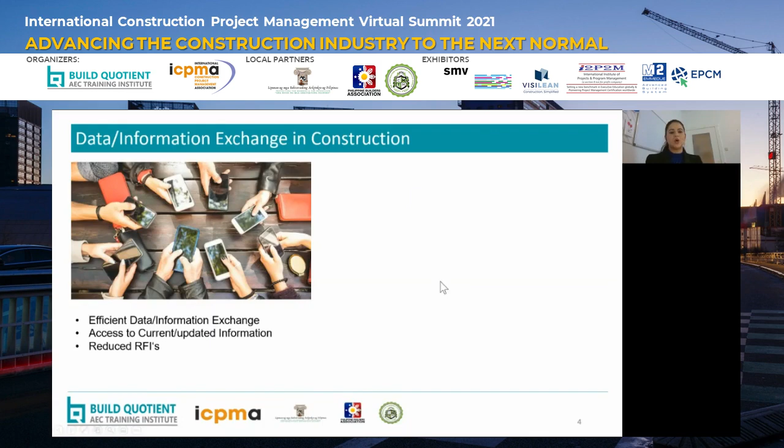Also, you can access current and updated information by using the internet. You can access all the information that has been stored internally, or in a cloud or a drive, and also share information with other people. In other ways, it has helped us reduce the requests for information that we require. So this is what our every day looks like. It's so easy to exchange information with one another.

But what does it look like in our construction industry? I think this picture speaks for itself. This is how information in our industry looks, how we exchange information with each other, and how we access the information. So I will put here a big question mark, because this is something we all need to think about, how we are going to go forward.

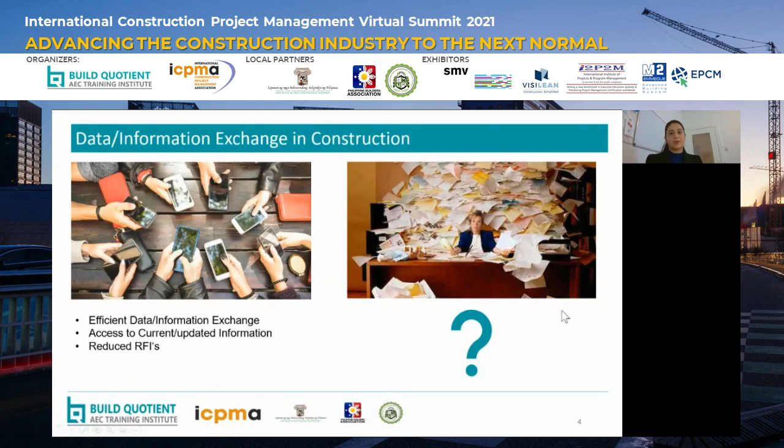So this is something definitely to think about. So let's go forward. So now the topic for today is the productivity in construction. Well, I would call it productivity loss in construction. And let's see how it happens. So now the construction industry is actually facing loss in productivity.

And after the research of the global report from KPMG, they figured out that only 60% results are achieved when compared to the other industries such as manufacturing and even agriculture industry. Now, why does this happen? Well, there could be a lot of reasons why there is non-productivity in construction industry, but one of the basic reasons is the existence of waste activities, or popularly called non-value adding activities in the construction.

Now let's just talk about it. What are these waste activities? Well, just a disclaimer before I go forward, I am not talking about the waste that we generate from our construction industry. That's a whole different topic to talk about. Today, what I'm talking about is the non-value adding activities that we have in our industry. So we have, popularly called, 8 different wastes in the industry. I'll go through them very quickly. There are rework, defects, inventory, motion, waiting, overproduction, transportation, and overprocessing.

Now, most of you would be familiar that all these wastes are generally occurring in our execution phase on the construction site. Because lean was derived from the manufacturing industry, we definitely say that all these wastes occur generally on the construction site. Well, in my opinion, this is also some kind of myth, because we definitely have defects and reworks even in our design phase, or you can say in the very beginning of our construction phases. So we'll talk about it further in the next slides.

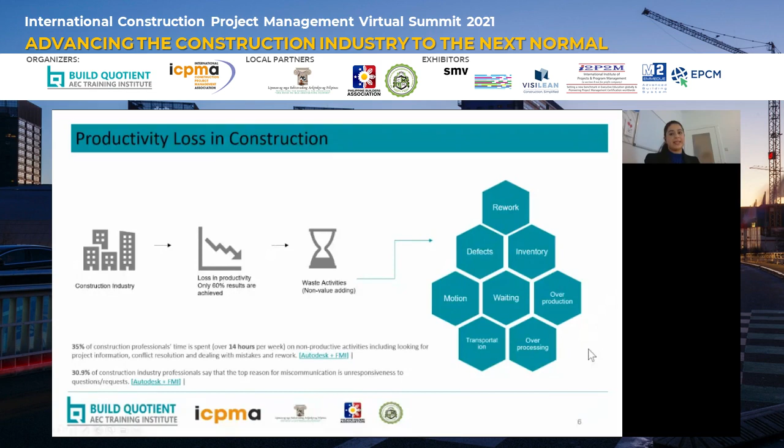So there are also some reports. 35% of construction professionals' time, which is actually 14 hours per week, is spent on non-productive activities, including looking for project information, conflict resolution, and dealing with mistakes and rework. And around 31% of construction industry professionals say that the top reason for miscommunication is unresponsiveness to questions and requests. So let's go forward.

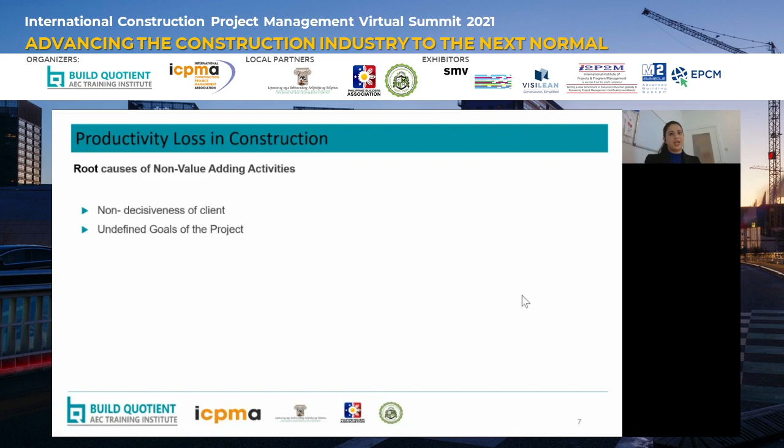Now, as I said, we have different waste activities in our industry. Let's also talk about the root causes of these activities. Well, some of them are, first of all, our very favorite non-decisiveness of the client, what he actually wants. Or maybe we cannot definitely blame our client. Sometimes the project information is not transparently delivered to all of our project participants. And that's why it's commonly called non-decisiveness of the client. Undefined goals of the project. When we don't have a vision or a goal for the project, what do we really want to build? This is actually one of the root causes for the waste.

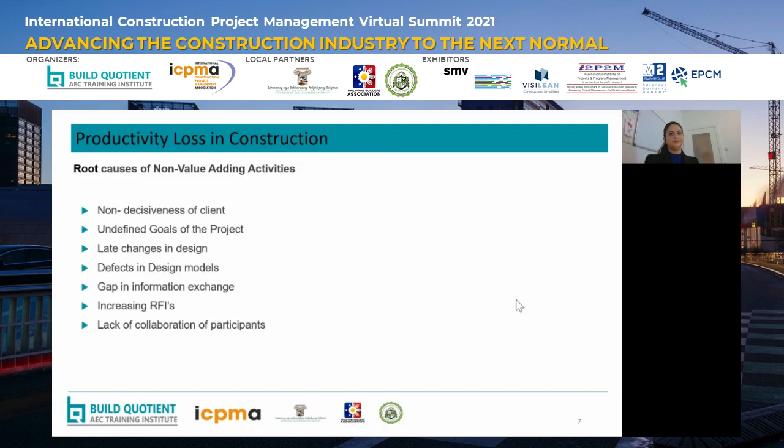Late changes in design. So all these 3 are actually correlated to each other. The next is defects in our design models. This is something to do with us, I would say. And gaps in information exchange. And last, increasing RFIs. So if you look at them, there is one thing common in all of them, and that is they are process related. These root causes for non-value adding activities are process related. So to understand how we can get rid of these waste activities, we first need to understand how our construction processes actually work. Oh, I forgot. The last one is definitely lack of collaboration of participants. Well, that's also a favorite one.

Now, what does lean say? Well, lean is a theory, but if I have to describe lean in one simple phrase, I would say lean says create value and not waste. Now, at this point, I hope most of you are familiar with what value means in lean terminology. And for those of you who are not yet familiar, I would like to explain a bit. Well, value could mean different things to different people. For example, value for me could be something else compared to value for you all sitting here.

But if we try to understand what value means here for the client, it could mean, for example, an economical design. It could mean high-end quality. It could mean that the project finishes in the time frame that was assumed in the beginning of the project. Or nowadays, we have some different kinds of goals, for example, sustainability or e-mobility. So value could mean anything. So this term is actually quite important for us, because until we understand what value means for the client, or what he is actually looking for, we might end up doing a lot of waste activities or non-required activities and then end up creating waste.

So let's quickly take a look at the lean construction principles. As I already said, lean theories were derived from the manufacturing industry, and later on, professionals and scholars gave us 24 principles for lean, and some of them are here.

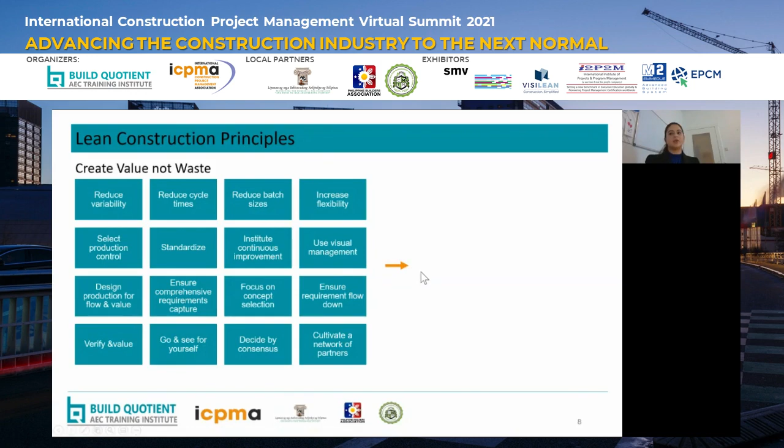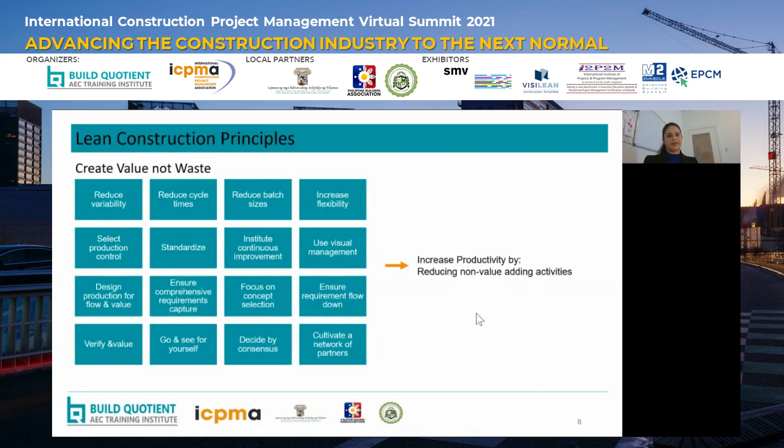If I want to summarize all of them, it says increase productivity by reducing non-value adding activities. Another point I would like to add is that lean tells us to standardize the processes. And first of all, understand that only when one phase is completely done should you move forward with the other phase. Sometimes working in parallel on all the different things actually ends up in a lot more waste than we think. This is something we'll figure out in the next slides.

So now, the topic for today: BIM, Building Information Modeling in Construction. I think this is quite a fancied subject nowadays. I have been to a lot of webinars and seminars, and you might have been as well. So today, rather than talking about what building information modeling stands for, let's first try to answer some of the questions. The first and most frequently asked question: is BIM a tool or software?

There will be different perspectives. Some might call BIM a tool, some might call BIM a software. But if I have to answer it, based on what the BIM handbook says, BIM is actually a platform, a collection of tools and softwares where we exchange information on a digital platform.

The second question: is there a difference between a 3D model and a BIM model? I come across this question at least 3 or 4 times when I try to explain to somebody what BIM can do. The basic difference is that a 3D model is a 3-dimensional representation of my own drawing, for example. It helps in visualization, but it does not contain most of the important information I would need to go forward with my project. Whereas a BIM model, as the name suggests, building information modeling, contains all the information that I would need. So this is the basic difference.

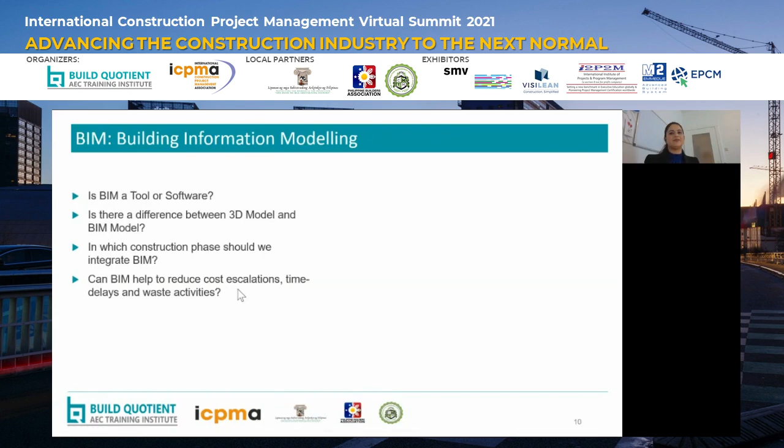As the construction matures in a project, the BIM model also has to be matured and updated through the project. This is a very debatable question, and we might talk about it later on, but in my opinion, it has to be introduced at the beginning of the project. Another question: can BIM help to reduce cost escalations, time delays, and waste activities? This is something we'll figure out in this presentation.

So moving forward: what are the BIM benefits? Before going into what BIM can actually do for us, let's see its benefits. It has pre-construction benefits in the pre-planning phases: better concept selection, better visualization of the prerequisites of the project, accurate cost estimations, early project analysis, and accurate benchmarks for the project. It also has design benefits: better visualization, design development, design collaboration, energy analysis, and cost estimation again.

Now, if we choose to do the execution phase and we want to introduce prefabrication, it's actually a time saver in this phase, and it helps us in accurate measurements because the shop drawings can be directly generated from the model itself. So it's quite accurate in its measurements. It helps in the construction sequences because we can actually link the model to our 4D platforms and try to get the construction sequences from there.

Helps in multidisciplinary collaboration. So not only does it help in the collaboration with the planners that we have, but also externally if we have external partners, for example, for fabrication. And again, the whole construction synchronization of the project. It definitely has some post-construction benefits, and those are improved commissioning and handover. As I said in the beginning, the BIM model is full of information. That means the commissioning reports can actually be directly generated from the BIM model.

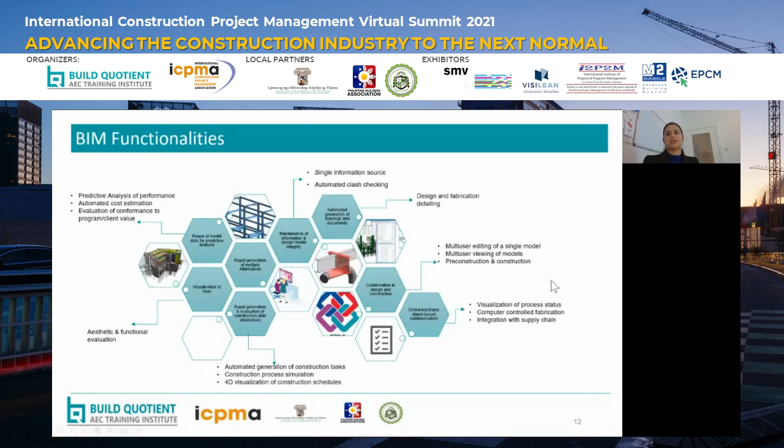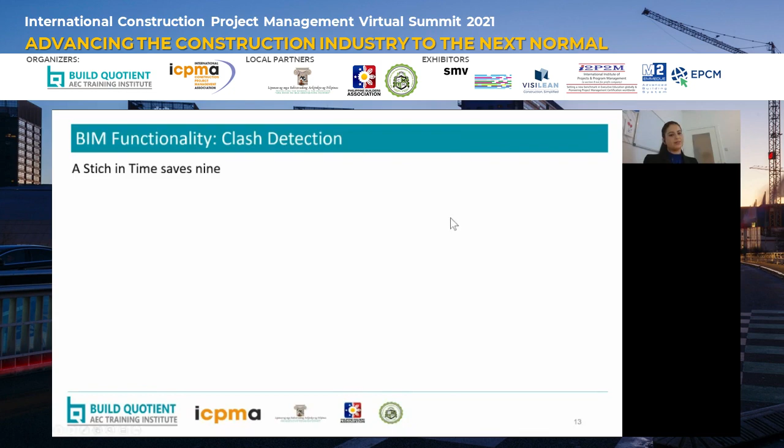So now, given the time constraint, if I have to pick one of the functionalities, I would like to pick automated clash detection, because I think this is quite popular in our industry, but at the same time, there are so many myths going around about clash detection. Some find it quite troublesome, some find it quite valuable. Well, I have named this theory "a stitch in time saves nine." Let's see how.

If I don't resolve it in the beginning, what is going to happen next? First of all, I have a defect in design that I have to change or rectify. Then we'll have to redo the drawings for the execution planning. And then there will be rework generated on site. Now we maybe have to do reprocurement. Maybe the elements that we ordered before are not required at the moment and we need different sizes or different details. So it's going to lead to reprocurement. Definitely we'll have additional inventory on site, leading to subsequent time delays.

So this stitch could be fixed. We said this has to be done maybe in 2 weeks' time, which is 10 working days, but now it's going to take more time, leading to cost escalation and supplementary costs, and also increasing the cycle times. And last, our favorite, it could actually lead to claims from the contractor. So you see, in this theory, a stitch in time saves nine. So these are just 9 simple stitches that I think would be possible.

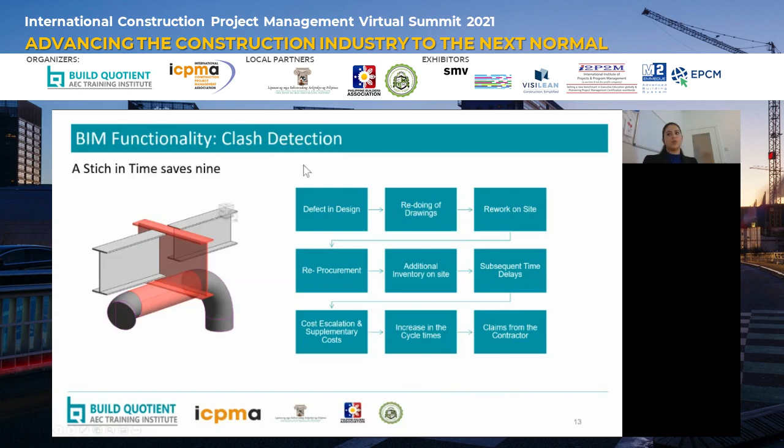There could be many more, but I would like all of you to just take a look back and try to understand your construction sites, how they were, and try to imagine this is just one simple clash I'm talking about. In reality, on construction sites, we have much more than that, sometimes maybe 1,000. So just imagine how much money, how much time, and how much waste we can actually save just by using this simple functionality of BIM.

So let's go further. I would also like to talk to you today about the traditional approach versus BIM and LEAN. Now, if you have been to some of the seminars or webinars where they talk about LEAN and BIM, they try to bring examples from the manufacturing industry. For example, how do we build a car and how do we build a house? Well, this is quite relevant for us, but we are construction engineers or maybe architects, and somehow we don't understand when an example is given from the manufacturing or automobile industry. So today I'm going to try to give you a simple example of the construction design process.

So let's say that we want to construct a house, a very simple house. And I would dedicate this house to my friend, Betty. I would say it's Betty's house. I want to construct it. Now let's see what the construction process actually looks like. So what are we going to do? First of all, we'll have to create an outline or a draft of our project. Then we'll create drawings based on that draft.

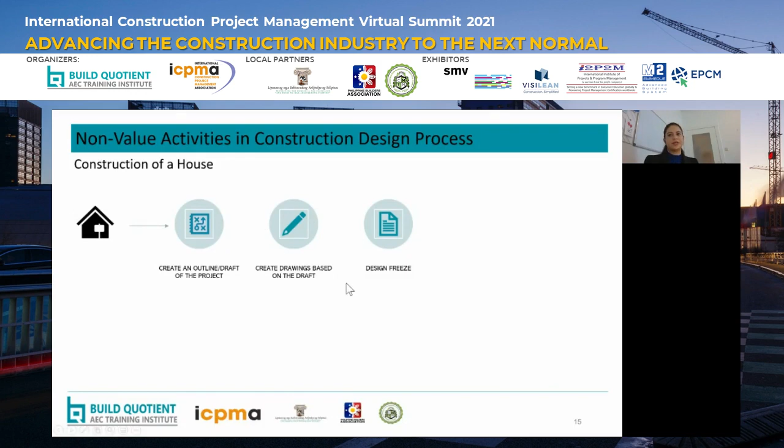Then we'll collaborate with our planners, for example, structural engineers, or with the MEP, and we'll finalize the design, and we'll do the design freeze, which means we are not going to change any of the design after that. So once the architectural designs are frozen, we're going to share the drawings with the other project planners so that they can do their work. And at the end, design complete. Very simple as it sounds. But in reality, does that really happen? Is it so simple? Well, let's see.

Well, in reality, there is a small discrepancy in activities or in the flow between design freeze and design complete, which means that sometimes we are lost in this loop. Because what happens in this phase is that if we want to do a very simple change, we have to come back to the design freeze, update it again, then share with the project planners, they will do their work, and then go to the design.

So it causes a lot of rework and redesigning, which is actually causing a lot of non-value adding activities. This is something that I mentioned in the beginning, that rework doesn't only happen on the construction sites, it also happens in the design phase. And what is the reason behind this?

Well, this could be design changes due to, as I said before, non-decisiveness of the client. He wants something else now. Or maybe it could be due to the technical changes, lack of clear goals of the project, or maybe the design is uneconomical and that's why we want to change the design. So you see, we are lost in this loop.

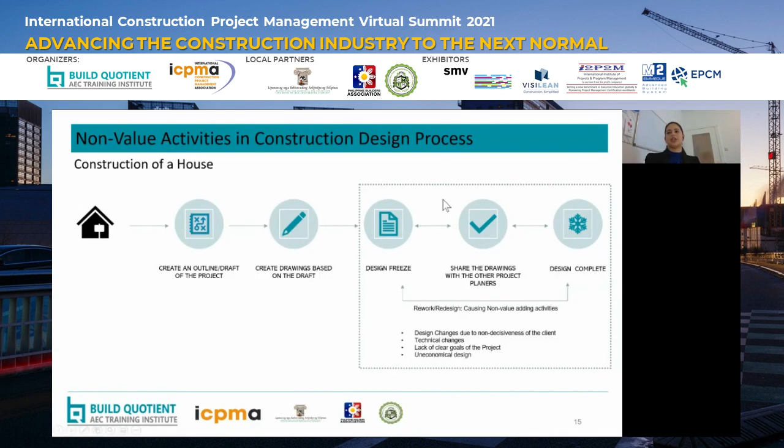Okay, so this is the loop I'm talking about. How can we actually try to reduce this time here? How can we try to reduce this rework? Let's try to understand with another example. So now again, I want to make the same house, Betty's house. But before going to my design or my pre-planning, I will try to use the target value design here.

Now, how I understand it is that we are going to first, as I said in the beginning, try to understand what value means to the client, or maybe how much is his budget. Is he looking for an economical design, or is he looking for, as Peter said in his last presentation, that cost is not an issue? So you know your boundaries, your boundary conditions here are well defined. And also try to understand what the client information requirements are.

That means if I want to use BIM in this project, what are the information requirements required by the client and how I need to proceed forward. So proceeding with the pre-BIM execution plan, one will make in the later phase. So instead of creating an outline, we start with creating a BIM model and sharing the BIM model with the other project planners. If we are in the BIM cloud, in the collaborative environment, we have one model. If we choose not to, then we can share our IFC files or the neutral files with each other. So the loop is going to be between us and the planners.

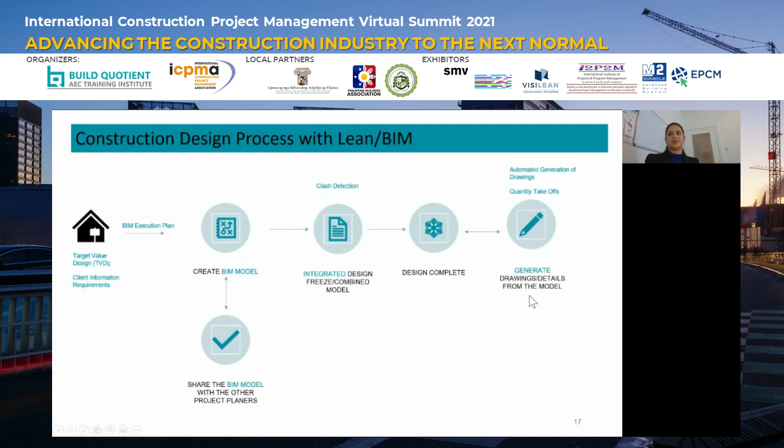So now how will I go forward? Now we have an integrated design freeze, or maybe a combined model, including the clash detection. And then I go forward with my design complete. So you see, now the sequence of activities has changed a bit. And at the end, we can automatically generate the drawings from the model, including the quantity takeoff. So what happened in this case is that we have less rework, which means less redesign and reducing non-value adding activities.

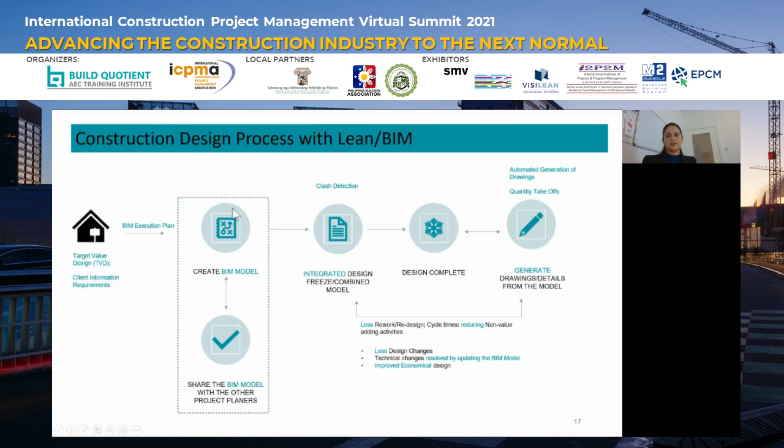And also the technical changes can be resolved by updating the BIM model. So every time I want to change something, all we have to do is update the model and generate all the information directly from the model. So this has changed the sequence of the activities. So now this is the loop that we are in, which means just updating the model, because it's a single source of information now.

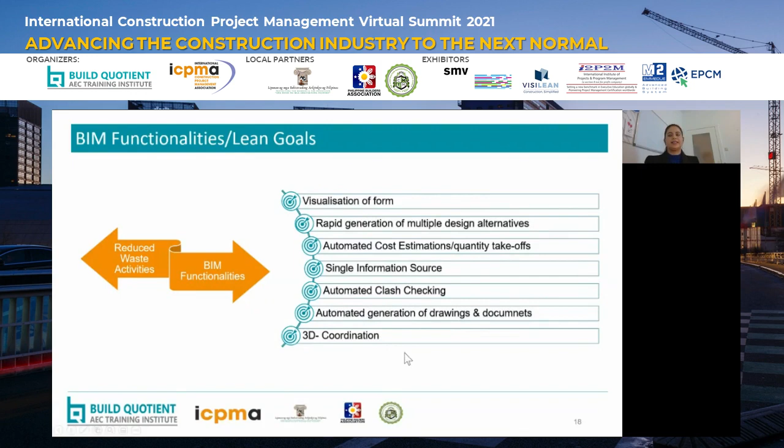So going forward and checking, we said we reduced waste activities with BIM functionalities, and how many of them are there? Well, these are some that I talked about in the beginning. So we have achieved some of them. So now quickly, because I'm running out of time, I'll come with a framework. Based on my research that I did in my master's, understanding how Lean and BIM work together, I created a small framework.

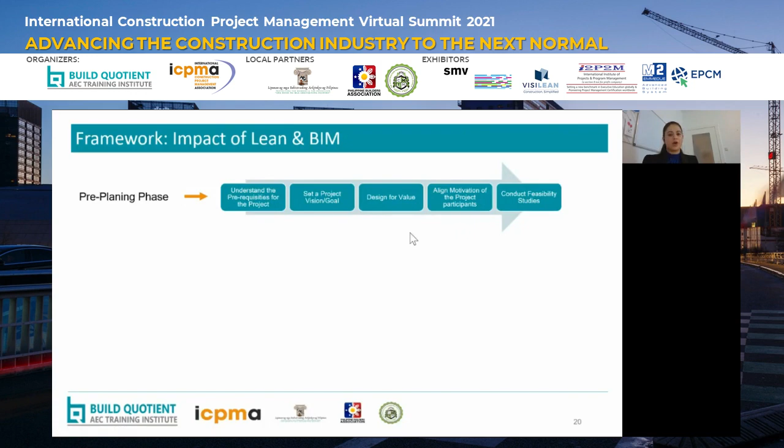So let's see what are the things that we need to take care of when we are in the pre-planning phases. First of all, we need to understand the prerequisites for the project, followed by setting a goal or vision for the project, designing for the value, understanding what value means for the client, aligning motivation of the project participants, which means that we are forming an alliance. It can be either in the form of contracts or personal understanding. And at the end, if possible, conduct feasibility studies before going further.

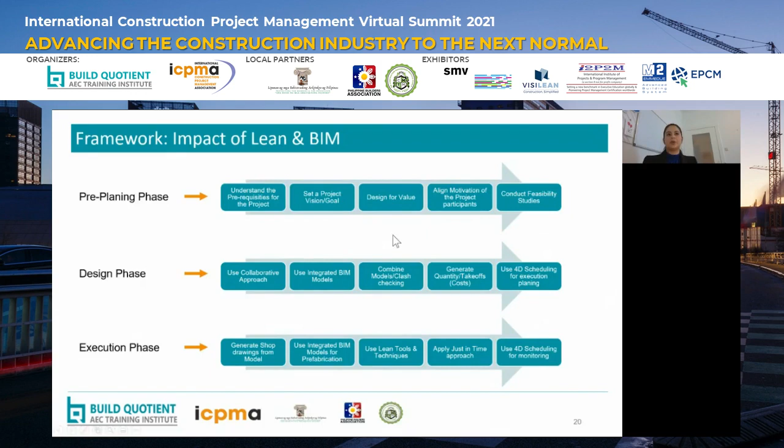In the execution phase, what we need to think about is generating shop drawings from the model, using integrated BIM for prefabrication if we have to do it, using lean tools and techniques, which I think Dr. Dev will talk more about in his presentation, applying a just-in-time approach so that we do not create inventory on site, and using 4D scheduling for monitoring as well.

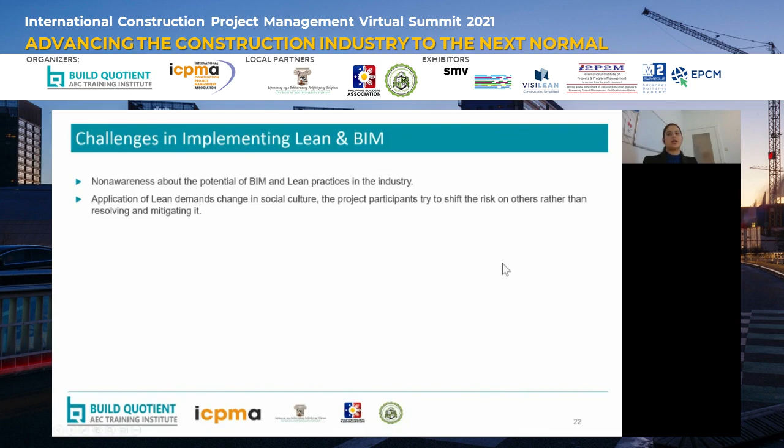One of the important ones is that application of lean demands change in social culture. The project participants try to shift the risk on each other rather than resolving and mitigating it, and this is completely against what lean stands for. Lean theories demand the partnership of upper and lower levels of the work structure, which is difficult to achieve due to hierarchy in the work structure.

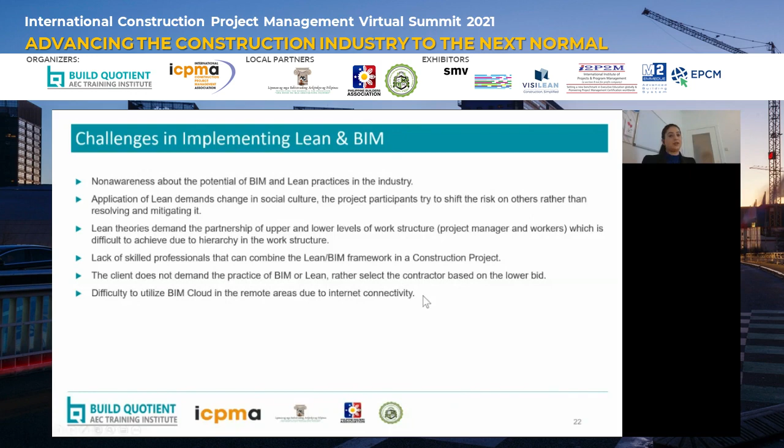Lack of skilled professionals that can combine the lean and BIM framework in a construction project. Sometimes the client does not demand the practice of lean or BIM and rather selects the contractor and the other planners based on the lower bid. And difficulty to utilize BIM cloud in remote areas due to internet connectivity. I know this is a very small challenge, but it does exist.